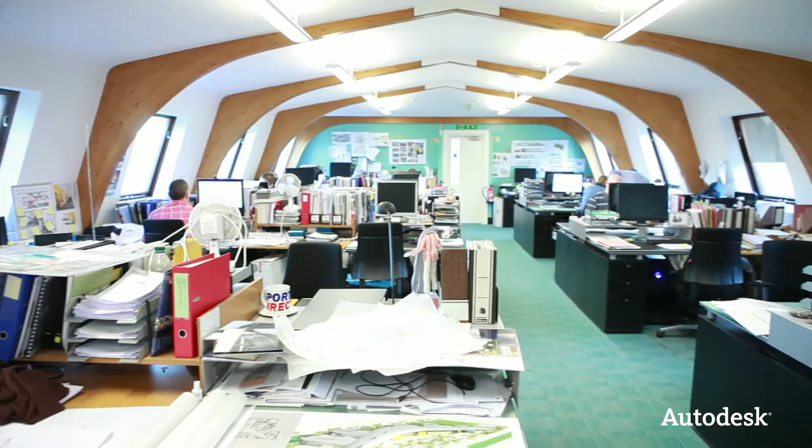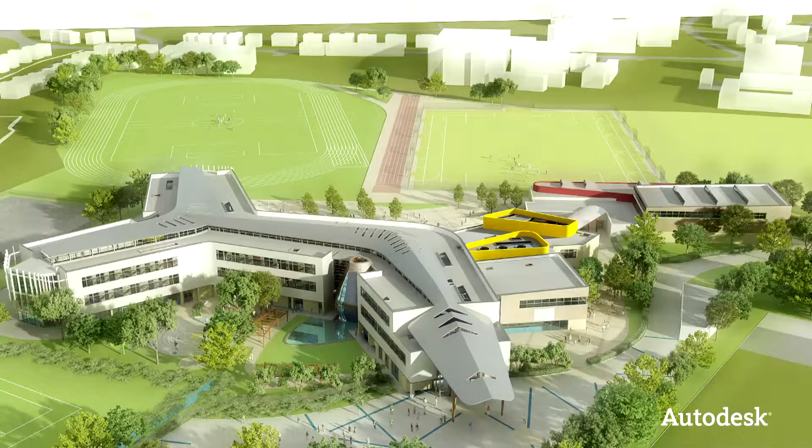Stride Treglown is an international business. We have 240 employees and our turnover is approximately 15 million. Stride Treglown goals are to have a practice that has international reputation, national coverage and local knowledge. We need to be innovative in our approach, in our designs and in our relationships, and that's a really exciting future for us because we want to be the preferred choice for contractors, clients and employees.

The main challenges facing the industry at the moment are the pressure on lower fees for architects to deliver buildings for their clients very quickly as well. So it's about the speed of delivery and it's about the lower cost of delivery. So it's actually about engaging with the client and about working smarter with them and finding new ways for us to deliver our work, to deliver our service, to build those great buildings for them.

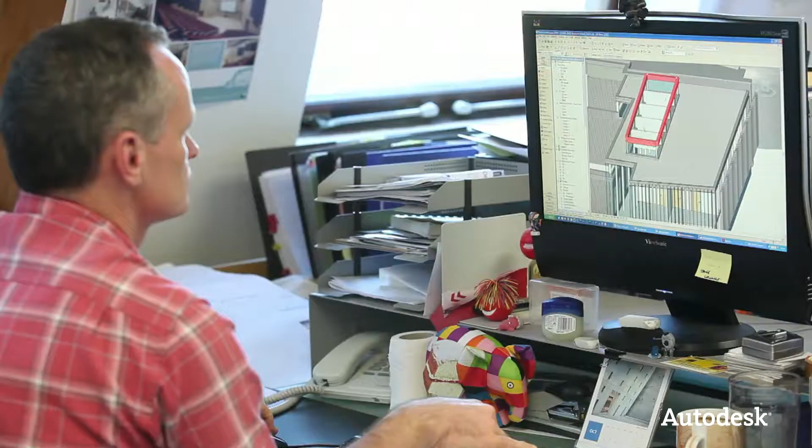Part of adopting the use of BIM is that you do have to change your core strategy within your business. You have to invest in the software, but importantly, there's a cultural shift in how you design buildings. People need to be trained differently. It is no longer a drawing board, an electronic drawing board. It is about creating a virtual building. And to do that means a shift change in work patterns. And once you achieve that, you get huge benefits from it. But getting there is a hill to climb, but once you climb it, you see great views.

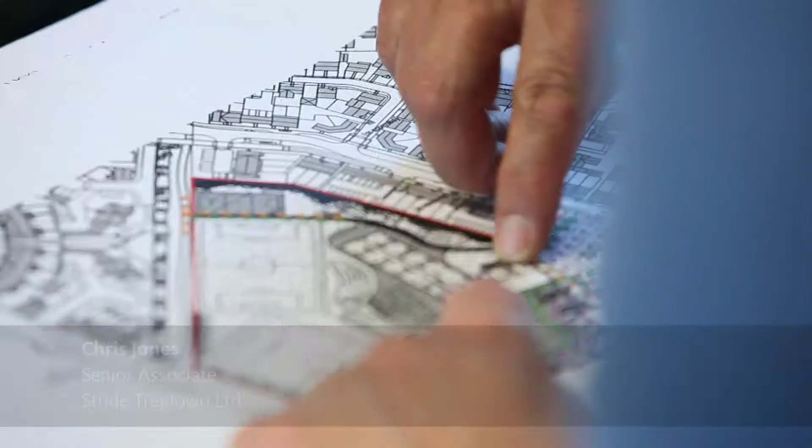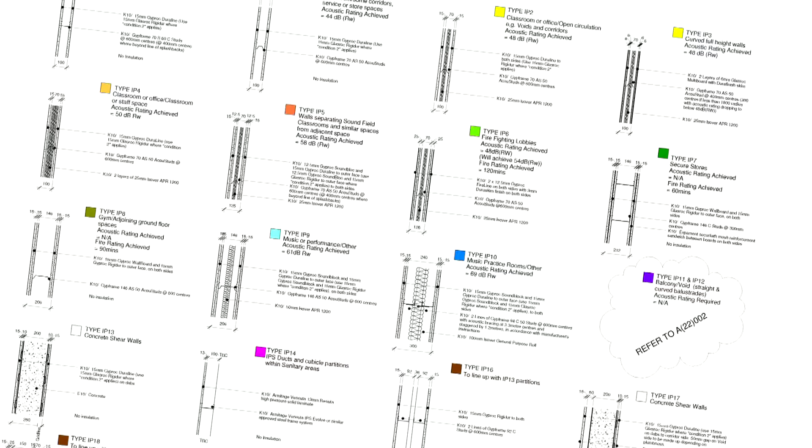We're finding that the increase in regulation and legislation is making the building process more complex. Probably leading that is the big emphasis on sustainability and carbon footprint reduction. And certainly what we can do with the software that we have is help that process along. We can now build quite complex models which allow that building to be studied and for that building to be verified against a whole raft of different legislative requirements.

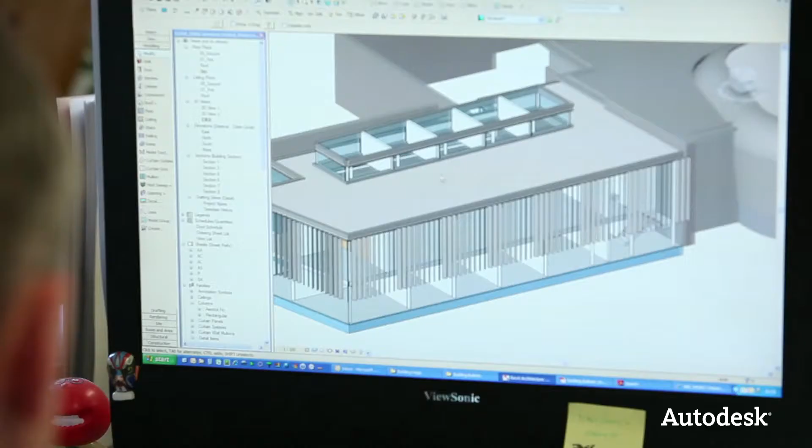The BIM and Revit element of our toolkit is incredibly helpful in making sure that we can check and cross-check how big our buildings are, what volumes we're creating and what space we're creating within them. And that's been a real boon actually for the business.

We've used Revit in particular to communicate to our clients, which has previously been quite a clunky process, but now we can take a laptop when we see our clients and take them through a building, spin the building around, take them sections through the building immediately. We can use it as a really iterative design tool, and that's really appreciated because what that enables our clients to do is to really feel part of that design process.

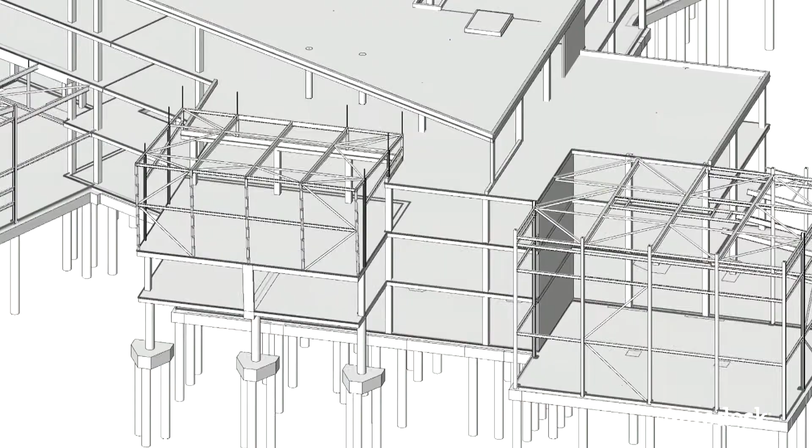Working in a large team means working collaboratively, and we've been working in that way for some time now, with a whole range of different disciplines and different consultants, different contractors, different subcontractors who have used BIM as a tool to communicate whatever they're doing. And it's beneficial to everybody. It's beneficial to the subcontractor because it makes his life a lot easier when he gets to site, and it makes our life a lot easier because we don't have problems when we get to site. And it's financially very beneficial for all of us.

The use of building information modelling enables us as architects to concentrate on the product, as in the building, rather than the process to get there. Because a lot of the repetitive element of design is done for you, so you can actually concentrate on what things look like and how they're going to work.

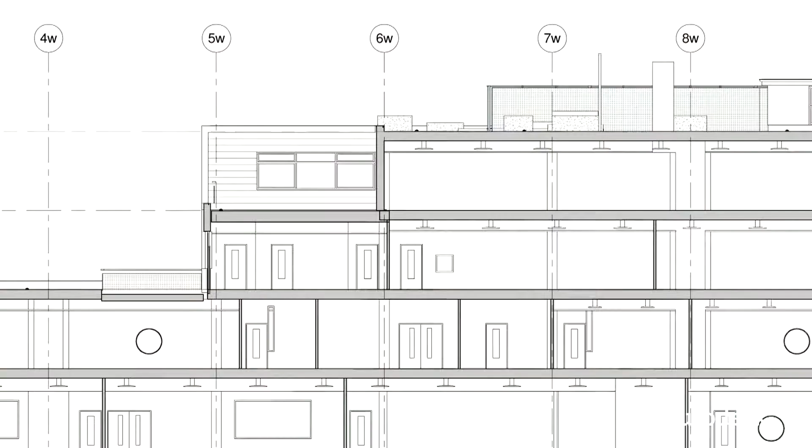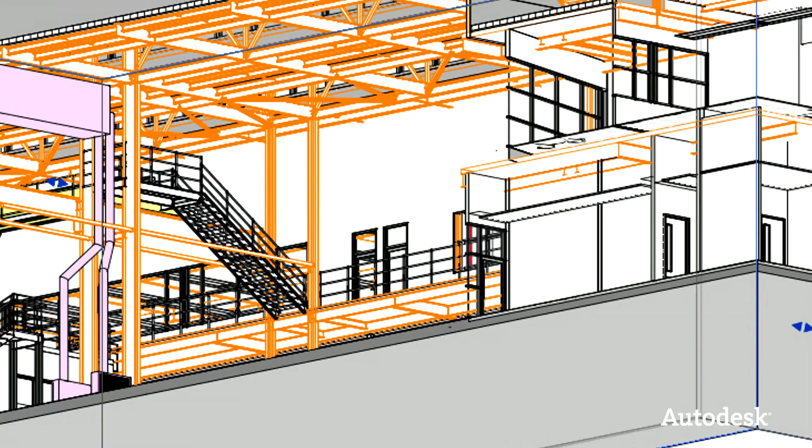The main workflow issues that we face is the speed with which we have to produce the construction drawings. And because everything is already in the Revit model at planning stage, it's quite easy for us to produce schedules and presentation information, and also to do 3Ds with the contractor or the other engineers to explain to them how the building works and where any conflicts might arise.

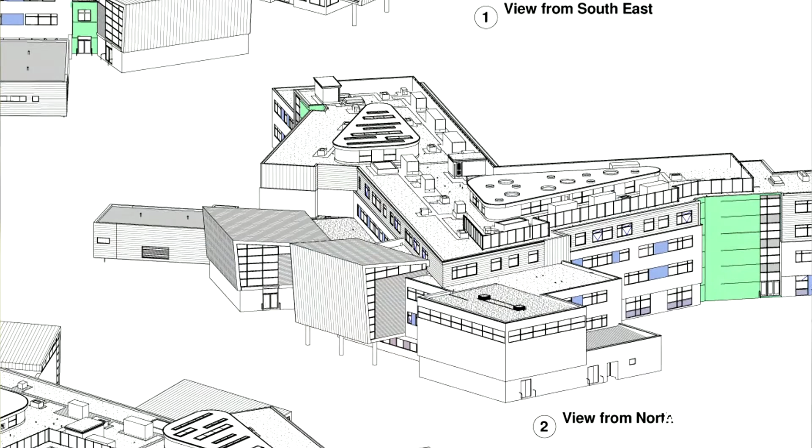What we try to do is use the same Revit model all the way through, and so that same model will continue through to the construction information. There's consistency and continuity. Chris and I work closely together to try and ensure that the design intent that he had in the beginning is actually implemented in the final building as built.

BIM helps us communicate better, and it helps us coordinate better. It helps us keep all our information in one place, and it means that we can then make sure that we're more efficient in what we do. My message to the industry is: can we work in a different way? Because when we do, and when we all invest in BIM, we will all see the efficiencies of it, and we'll all start to see the delivery of projects in a different way. And once we do that, we get an exciting future.